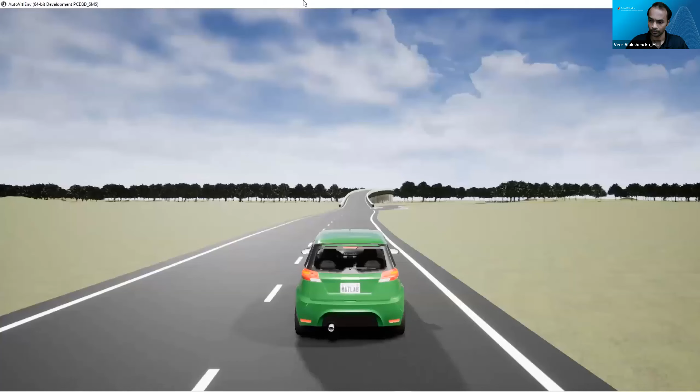Let me know if you all can see my screen. So you can confirm once. Is it visible, my screen? Yeah. Okay, perfect.

So before we get started, there are only a few people, but still I wanted to understand what's your background. Are you a student, or you're working, or you're part of a Formula Student team? Because Formula Bharat is basically for the Formula Student teams, and a lot of times whenever we do the session, it is more inclined towards them. But if you can give me some background, that will really help us understand where you are coming from.

Hi, this is Shrikant. I'm actually a working professional at ZF Commercial Vehicle Control Systems. Yeah, nice to meet you, Shrikant. Thank you. Myself, Nitin, I'm a student at VIT. Okay, nice, thanks for confirming. Hello Veer, I'm Kaushik from Hercules Racing Team. We have met before during the FST event. Okay, awesome, great. Okay, I won't push everyone to talk, it's completely fine. So I'll get started.

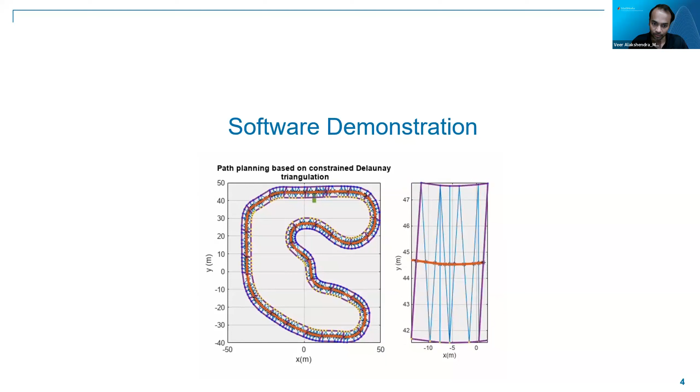What happens is that you have to run all the other algorithms as well: SLAM, your path planning algorithm, trajectory tracking, the perception algorithm. There are multiple autonomous algorithms that you have to run. So whenever you're building a path planning algorithm, you have to make sure that it is going to go on a vehicle, so it should work. And for Formula Student and racing competitions, it is quite complex, because the vehicle has to race and it has to improve the lap time.

So let me go back, and I have my script open. One second.

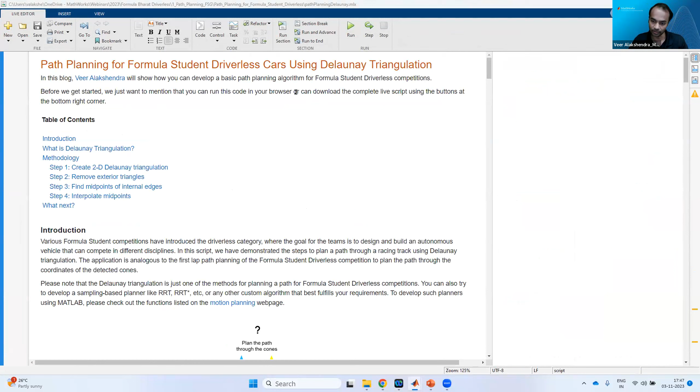Okay, yeah. So this is the script which is available, and I'll talk about how just by using simple functions, simple understanding of triangles and math, you can build a whole path planning algorithm for these kinds of scenarios. Even if you're not from Formula Student or an autonomous racing competition, to give a brief of the problem statement: you have a car, and then you have some blue cones and some yellow cones.

This path planning will come once you have detected all these objects, of course. We are assuming that your detection is proper, you're 100% detecting all the cones and not missing any of them. And if there are any outliers, you're neglecting those or have removed them. So that's the problem. What the vehicle has to do is, based on the position of these cones, find the path through it.

Again, the assumption is that through the perception algorithm we know which are the objects, and we have the algorithm written for which are the blue ones, which are the yellow ones, and what are the coordinates. So this is only the path planning. What we are doing here is using a concept called Delaunay triangulation. The criteria says that for a set of points in 2D, a Delaunay triangulation of these points ensures the circle associated with each triangle contains no other point in its interior.

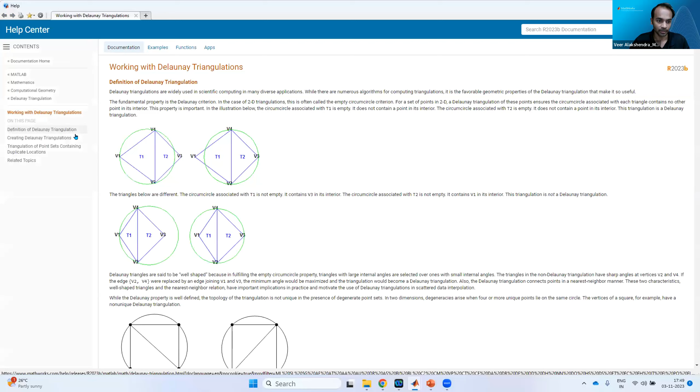For example, let me open this one: these are the triangles formed by the vertices V1, V4, and V2, and similarly V4, V3, and V2. So here both T1 and T2 fall under the Delaunay triangulation, or you can say these triangles are a Delaunay triangulation.

Whereas if you see the next example over here, when we are forming the circumcircle, there's a vertex which is falling inside the circumcircle. So in this case, these two here are not a Delaunay triangulation. So basically, you just have to form a circumcircle based on the vertices that we have. If there is no point inside it, then it is a Delaunay triangulation. If there is, it is not a Delaunay triangulation.

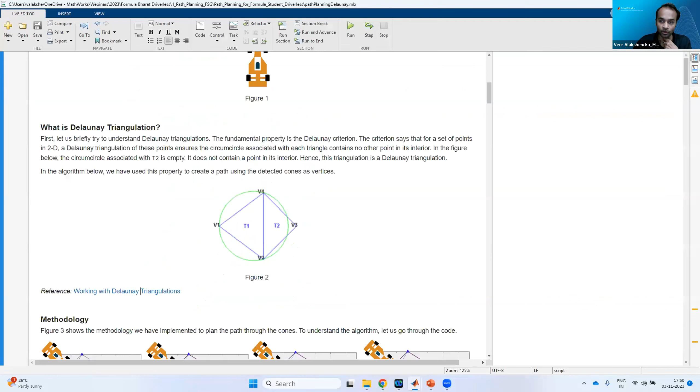Okay. So with this basic understanding of what Delaunay triangulation is, we have come up with a simple basic approach, which is also being used by multiple teams. We have been judging multiple teams across the world, and we are seeing that students are following this method to interpolate, to find the path through these two cones.

So first, we use certain functions to create the Delaunay triangulation for a certain set of yellow cones and blue cones. And then we remove the exterior triangles. Now, if you want to write your own code to remove the exterior triangles, it can be done. But there are certain built-in functions in MATLAB which can help you remove the exterior triangles.

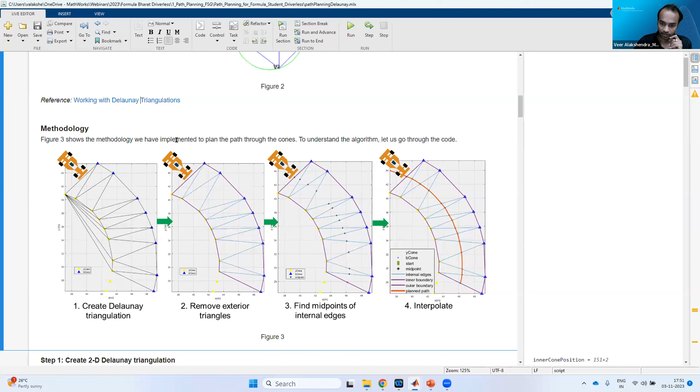And then finally, we find the midpoints. So we have these vertices connected by triangles, and then we find the midpoint, and then we finally interpolate. Okay, so this is how we plan the path.

Now, going in detail through each of these steps, first we load the coordinates. As I mentioned, we are assuming that the perception has been done. So in this case, we did the detection using YOLO, and we have found the coordinates of the different blue and yellow cones. And then there is some pre-processing of the data, because when we are using the built-in function for Delaunay triangulation, there is a certain format that we have to consider.

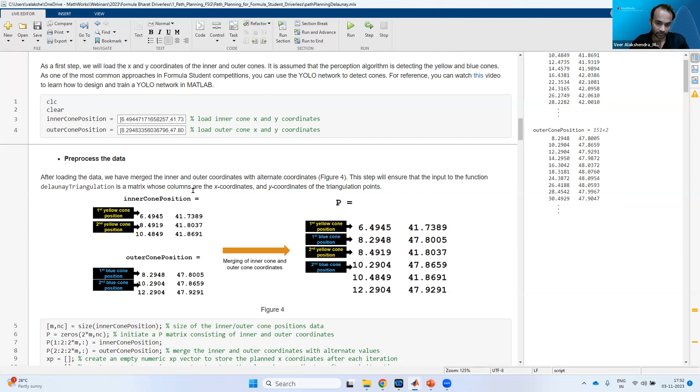So what we have done is that we had the inner cone positions for the yellow and the blue ones, and then we merged them alternately: yellow cone, blue cone, yellow cone, blue cone, once we have the coordinates. Again, this is not necessary in general. It is just being done here because the function requires that they be arranged in an alternate way.

Once that is done, using the Delaunay function that we have, called Delaunay triangulation, we are forming the triangles. So over here, you can see that after arranging them alternately, we have a total of 4 vertices, and then we form the Delaunay triangulation. So this is the triangle that we get. Again, this is the built-in function which we are taking advantage of.

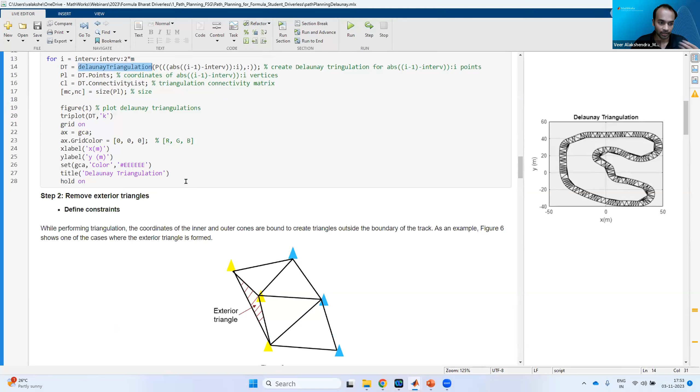And then, from the function, you can extract different properties. For example, here we have to remove the exterior triangles. I can also show what the Delaunay triangulation looks like once we run the program. Let me run it once. Okay, it's running. Meanwhile, I'll go through the steps.

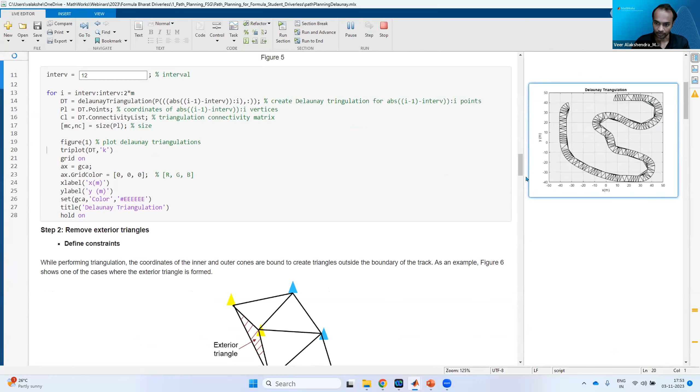So we remove the exterior triangles. To remove the exterior triangles, we have certain functions, and we are removing this kind of triangle. For example, if we take these many triangles, there will again be a Delaunay triangulation formed, because there are 3 vertices, so it is forming a triangulation over here as well. Now, if we keep this, then of course the path may be disoriented or deviated, and it can go from here to here. So there are multiple approaches.

One approach we are showing over here is removing the exterior triangle. Another approach could be that, using different properties, you can form a bound. So you can form a bound between this one and that one, and then you can mention in the code that I have to pick the sides only between these bounds. So that is also possible, but we are actually using the function properties.

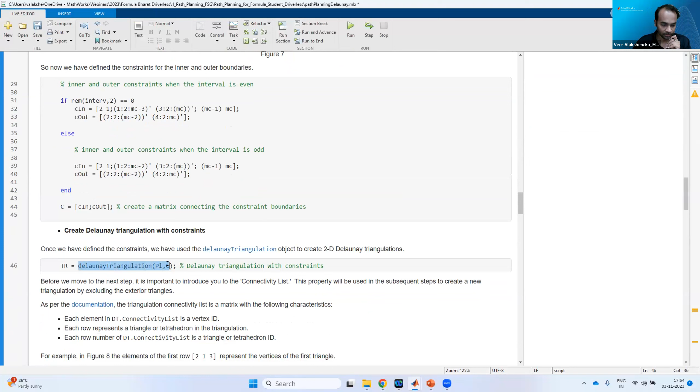So for that, what we do is we define the constraints. Okay, so there's a certain format. So we are defining the constraints over here. And then we are using a certain create Delaunay triangulation with constraint function that is over here. So Delaunay triangulation with C is basically mentioning the constraint.

And once you do that, what happens is that you basically remove this triangle, and finally you get some triangles like this, removing this part. Okay. And once you have used all these functionalities and you have removed it, this is how it will look like. So this is the triangle that we'll get, okay, after removing this.

Now, after this, it is quite simple. Reason being that you have all the set of different sides, and you just need to find the midpoint out of it. Now, many a times students ask, okay, why are we doing so much complication forming triangles? Why can't we just have straight lines between this?

So if you do that, the problem will be during the turning. If you're turning, in that case, you might miss some of the points, because, for example, if you're missing some kind of cones, you might miss some of the sides. Okay, and in that case, maybe there might be some deviation.

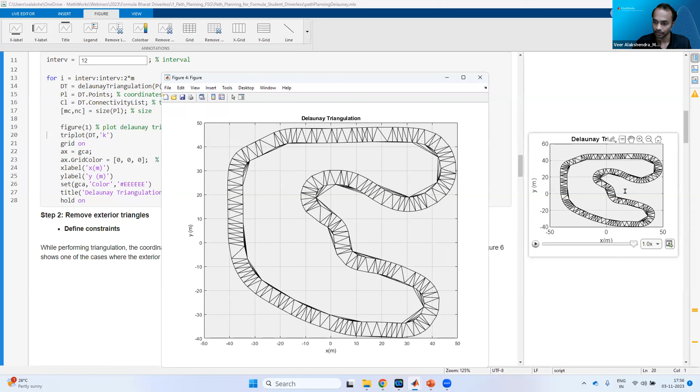So this was the image which is showing all the exterior triangles over here. You can see that this is forming different exterior triangles. So this is the one way. And then if you go down further, okay, so we have done all this part. And after that, once you have removed that using different functions, this code is available, no worries, you can have a look into that.

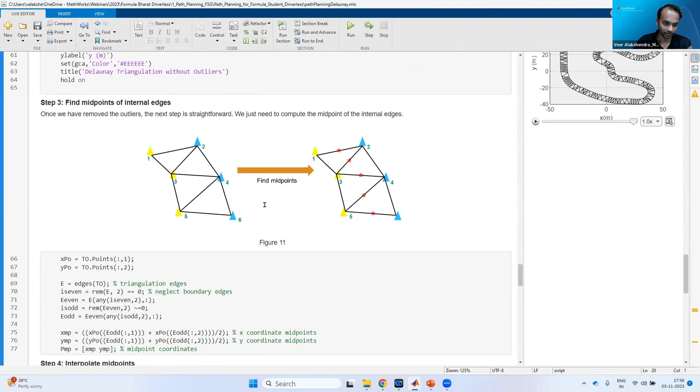Then what we do is, once we have this, we just find the midpoints out of it. Again, there are simple ways to find the midpoints. There's odd and even ways I have mentioned over here in the code. And once you do that, further we do the interpolation. So this is the final thing that we get over here. This is what we get.

Now, this code has certain limitations. The limitation is that we have already assumed that if there are any false positives, we have removed them. But if you run on the actual track, it might happen that your perception algorithm might miss some of the cones, or there could be some false positives. In that case, you have to improve the code.

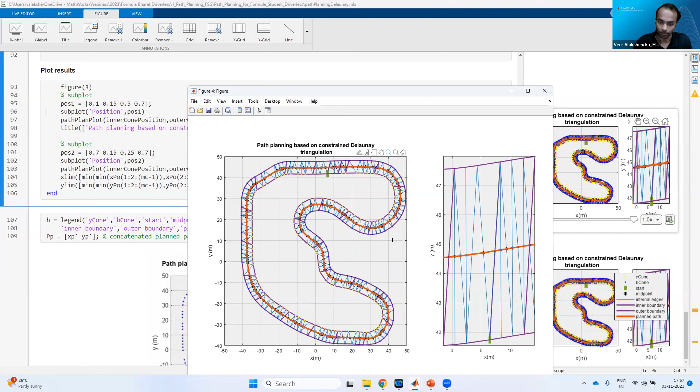So that's also something that we haven't done as of now, but that's not a big deal, because once you have the false positives, again, you have to accordingly mention the constraint. Once you mention the constraint that this is our constraint, we have to be in this bound, you can get rid of all the false positives, or any outliers, if by mistake it is detecting those points as a cone.

Okay, so this is one kind of solution that we have come up with for the Formula Student competition. Now, this can be further improved. A lot of optimization can go into this, and then you can also have race time optimization. I'm not going in detail into that because we have limited time. Okay, and already it's 5:58.

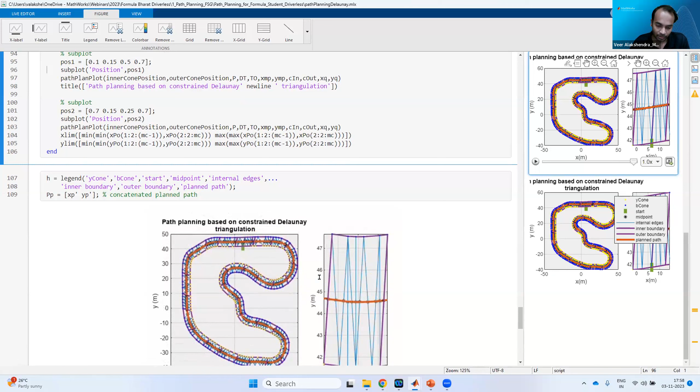But nevertheless, can I ask someone, if you are a little bit aware of other generic or popular algorithms, like there are graph-based algorithms, there are hybrid. A-star is one of the very famous algorithms in robotics as well. And then under that, we have RRT star. Or in layman's words, these are tree-based approaches, which will form different nodes, and between those nodes, it will try to form a path.

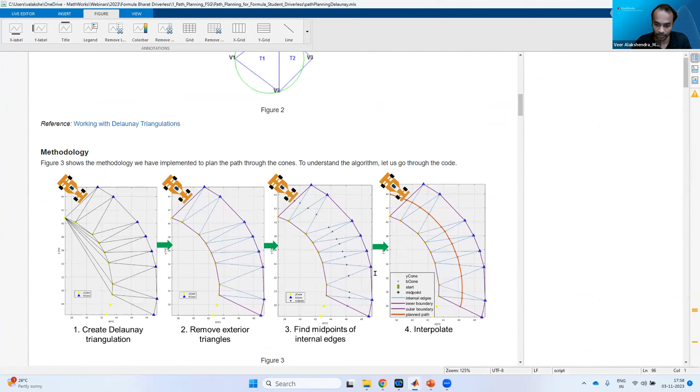Can anyone answer that? Why in scenarios like this, students or teams, even the strong teams that we have seen, the top teams of the world, mostly rely on this kind of triangulation method? And why not these A-star or RRT star, the different path planning algorithms that we have? Do you have any idea? Do you want to share anything? Time complexity, maybe?

Sorry? Time complexity. Yeah, it's basically the computational complexity. Yes, that's a problem, a major problem. The one that we saw a few years back, there was someone who was using RRT star, and the code was really good. It was really working. For example, if you take a simple occupancy grid, it was forming all the different nodes and trees, but it creates so many nodes that it can be computationally complex, and then you have limitations on your hardware.

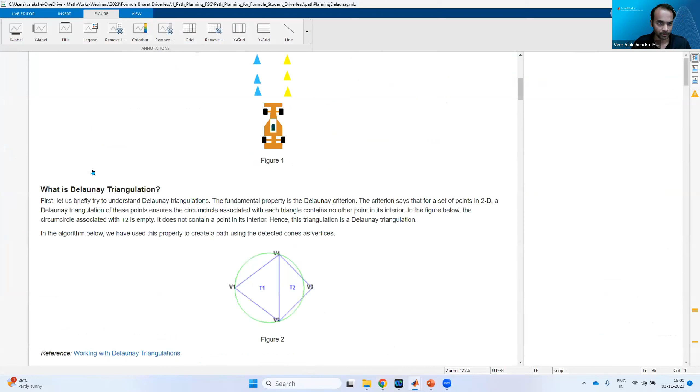So this is one of the major reasons that students are going for this triangulation method. The approach that we saw is very simple, but you can definitely improve it. This code is available on our webpage. We haven't yet published it on GitHub, but it was in the form of a full blog. So if you want to have a look, or open it in MATLAB Online, you can.

All these blogs that we publish have a feature to open them in MATLAB Online. This is the button that you will get: run in browser, download live script. So you can download from here, or you can run in MATLAB Online.

Any other question you have? If not, I can go to the next part, and then we can start talking about the VD part and the trajectory tracking controllers, which are the common ones mostly used in autonomous driving, and how the tools provide quite an easy workflow to implement that.

I have one question about the deployment. Let's say I'm reusing the Delaunay triangulation method shown on the web page. If I want to flash it to my hardware, what is the recommended approach? Is it usually flashed in hex format, or does it have any MathWorks-specific extension for which we have to take care of some additional steps?

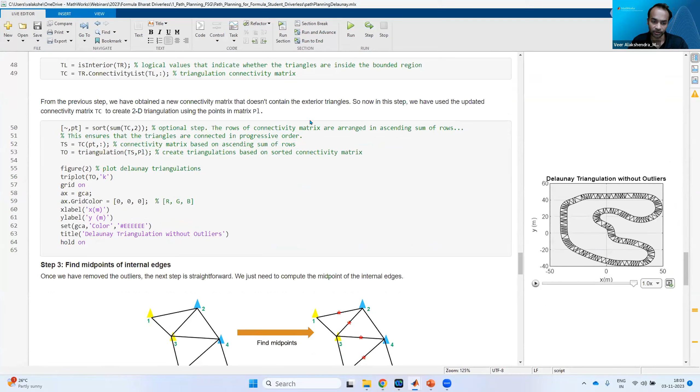If you write it from scratch, that can be code generatable. That is one of the limitations of the code currently. I'm forgetting the function that we used over here, but there was one function which was not letting us generate the code. Otherwise, most of the functions can be done. It will be using MATLAB Coder and Simulink Coder, and if you are using standard boards, you can use the support packages to generate the code. I'll do one thing.

We recorded a full tutorial series for students, or I mean anyone can do it. It's a full series on the code generation capability. So it will also explain what are the file formats that you get, and once you generate it, how you can edit those files. So that information you can find in the full training.

Yeah, that would be great. Yeah.

So this is the full online tutorial that we have, and this is an in-depth tutorial. So you can see over here, it starts with code generation with MATLAB and preparing and customizing generated code for MATLAB, then code generation with Simulink, and then again how to customize. For example, you have all the hex files, how you can customize them. And then finally, we have also shown a deployment part over here. So this is the one.

And in the last webinar, we covered this YOLO algorithm deployment on Jetson Nano. This also you can have a look at. This was the NVIDIA Jetson video content that we covered in the last session, so you can have a look into this as well. I hope this will help you.

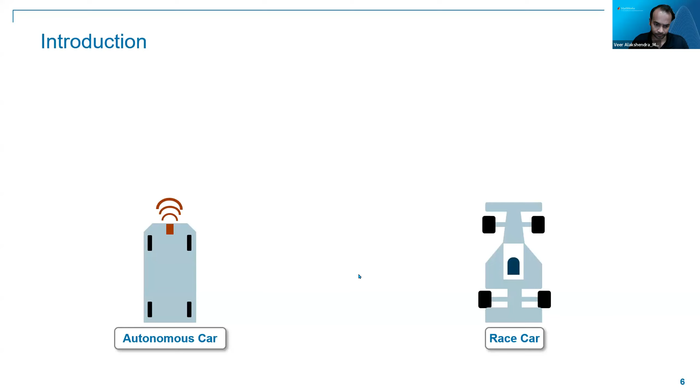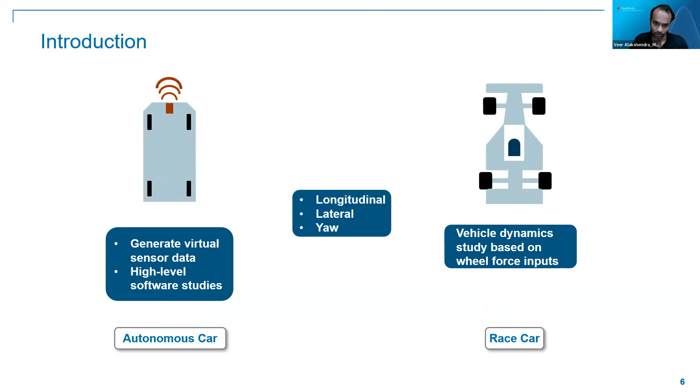For example, if you are participating in autonomous competitions or looking into autonomous vehicles, and your focus is just to generate virtual sensor data and high-level software studies, you can build a simple model. Or if you want to build a race car with proper vehicle dynamics study based on different wheel forces, a high-fidelity model, that also you can do, through which you can get the longitudinal, lateral, and yaw motion.

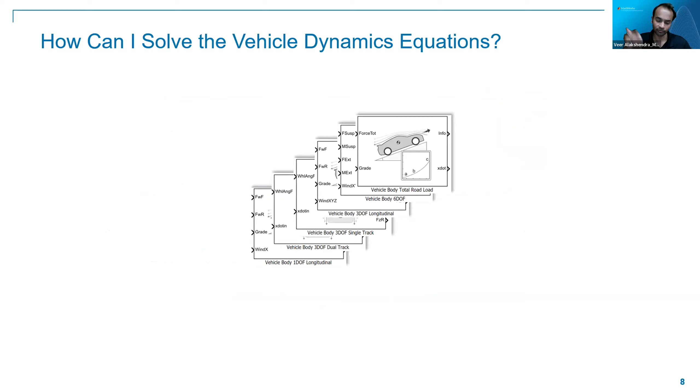Now, how to solve this? One method is, as I explained, you convert the set of equations into a model. Or we have provided a blockset called Vehicle Dynamics Blockset, consisting of different pre-built blocks where you just need to define the parameters, and then based on certain inputs, you will get the expected output. It consists of a library of blocks: powertrain, wheels and tires, steering, suspension, vehicle body, vehicle scenarios, and utilities.

It also has pre-built scenes. For example, for autonomous driving, you are going to create some kind of virtual scenes and scenarios. We have already added certain pre-built scenes, but if you want to build custom ones, that can also be done; we explained it in the first session using RoadRunner. We have also added certain examples which you can refer to, or for virtual testing, you can parameterize the whole model and perform the virtual testing.

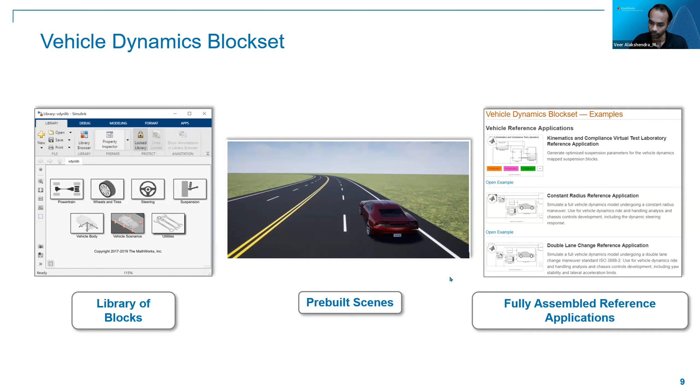First of all, we'll look into certain blocks and see how you can build a simple model to a complex model with these vehicle dynamics blocks. So let me open that. I'll close all the other things. So for example, if I just open the simple one over here, this is just a simple model. In the library, let me go through the library that we have.

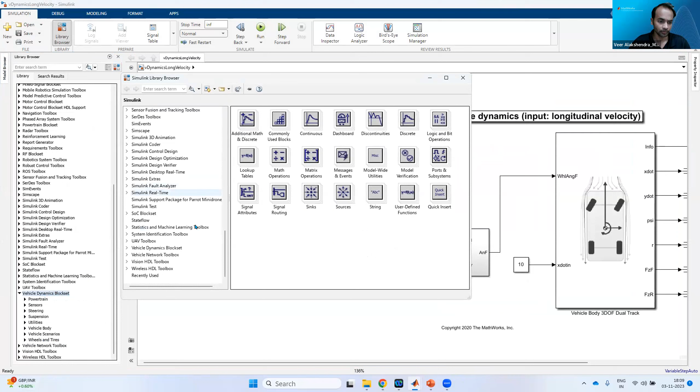And I'll undock this. So over here, you can see that we have all these different sections. Okay, so vehicle body, you can find the vehicle body over here. You can have a 6-DOF model or you can have a 3-DOF model over here. Similarly, we have different suspensions, steering, powertrain, and tires.

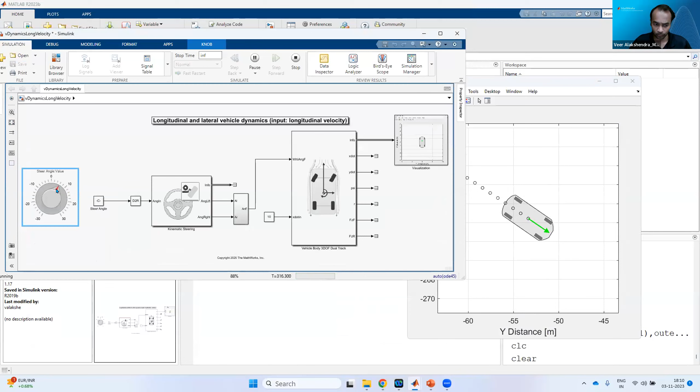So for example, if you just want to collect some kind of synthetic data, so you have built a model and you want to simulate it in some kind of Unreal environment, it is quite simple. For example, these are different blocks, and what you can do is, based on steering input, you can run the vehicle in a simulation environment. I'll come to that simulation environment which I'm talking about. This is how to do it.

Okay. Now, this is a sort of a very basic model, I would say. It doesn't have much of the information. Further, if you want to build some kind of more complex model, it can be something like this one. So over here, we are going one step ahead. In the earlier model, we have the vehicle body 3-DOF model.

So if I double click on this, this model lets you choose how well defined you need the vehicle dynamics model to be. Whether you just need the external longitudinal velocity, or you want just the longitudinal forces in the tire, or you want both the FX and FY tire forces, which could be a more detailed model. And then further, you have these other parameters that need to be defined: longitudinal, lateral, yaw, aerodynamics, environment, and simulation. Okay.

And then going ahead, we have a steering system, which was also earlier. And then what we have done is we have added a simple powertrain over here, comprising of one simple longitudinal wheel disc brake. And then we have a simple equation-based powertrain. Here, we are not using any block set. It is just based on the power calculations. We have a simple powertrain giving you the axle torque, and then we are using a rear wheel drive and sending the axle torque to the tires.

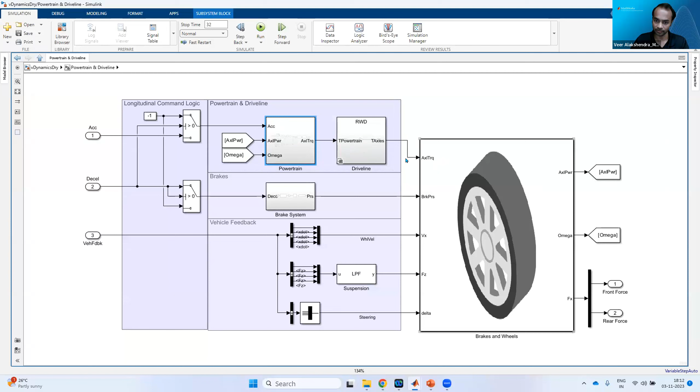Okay. And now again, here also, based on your steering, acceleration, and deceleration, you can run the model. Okay. So basically the whole point is that whether you want to create a simple model or a more high fidelity model, that can be created using this block set.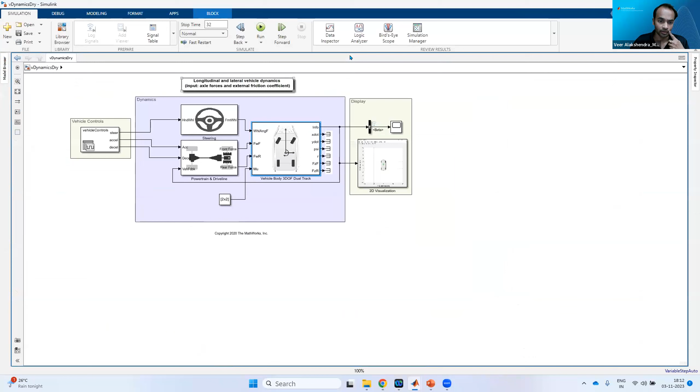Now, for example, if I go inside this vehicle body part, let me get inside this. Once again, let me minimize. Yeah. So all these blocks that we see are all open. So you can go inside and look into how we have built this model. But more than that, you can also have a look into the help document, because this help document will make you understand how we are building this block using different equations. Okay.

This is the whole documentation that we have provided. This will help you understand that there are multiple input and output ports. So whether it is a vector, whether it is a matrix, whether it is a 3x4 or 4x3 matrix, it will help you understand how you have to input the signal. Okay.

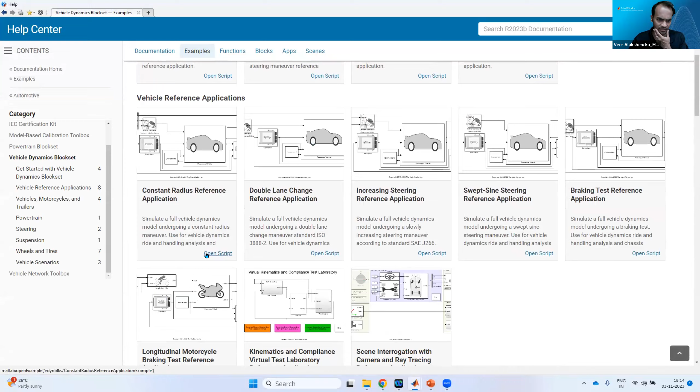Now, further, if you want a very high fidelity model, if you want to include each and everything in your model, it should be a 6-DOF model, it should have a controller, it should have a full complete powertrain. So let me open that one more. So in here, when we go to the Vehicle Dynamics Blockset, in the examples, if we open the constant radius or double lane change, whichever you want to see, this will open this model.

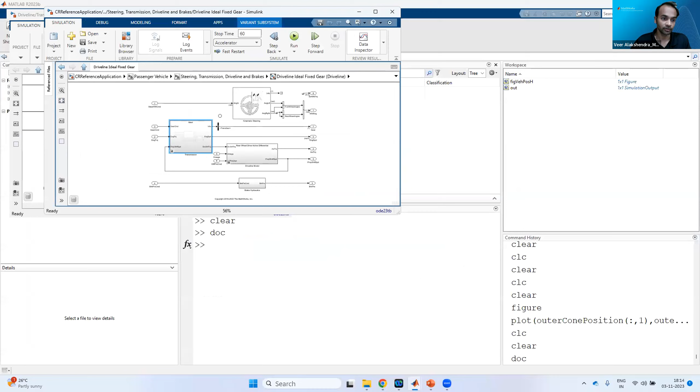Okay, so now you can see that if we enter this passenger vehicle subsystem, this has engine, transmission, driveline, and brakes in detail. Here we are using the kinematic steering. We have a transmission, which is a fixed transmission over here. And further, you can also have a driveline model. This driveline model looks like this. This is the active differential that we are using. And we have also mentioned the torsional compliance for both the parts, for the axle 1 and the axle 2.

Now, this is just giving you references that you can, based on the fidelity of the model that you require, you can build the model. If you're learning, if this is your first time, the suggestion would be just to start simple, build simple models, because in that case you will be able to build more and more, you will understand the whole concept of modeling using these toolboxes, and further that can be used as an advancement to more high fidelity models.

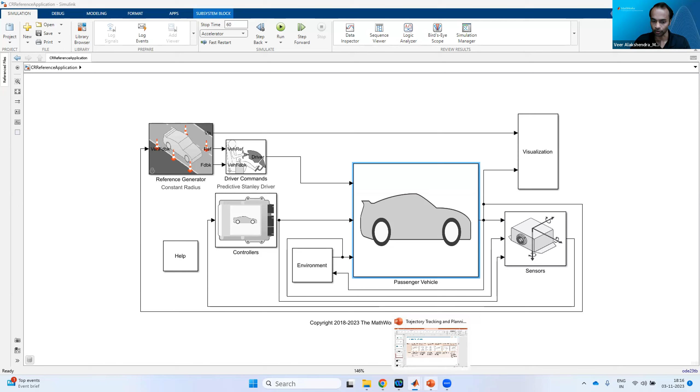So what I'll do is, now that you have an overview of the vehicle dynamics model, now we'll see how you can build trajectory tracking controllers just by using simple blocks. Before we get into that, if you have any questions, please feel free to ask. Okay, if you don't have, no worries.

Do you know what are the different types of trajectory tracking controllers? Or have you worked with any of the trajectory tracking controllers earlier? Or are you still in the exploration mode, learning what the different trajectory tracking controllers are? I know about model predictive control. MPC. Okay. Fine. Thanks for answering that. So what we'll do is we'll go step by step.

So for example, there are three popular trajectory tracking controllers, and then we have also your favorite PI controllers, but we are more talking in terms of steering control, how you do that if you want to control the steering. The first one is a pure pursuit controller, then a Stanley controller, and the third one is the MPC controller. Now pure pursuit and Stanley controller, these are both geometric controllers.

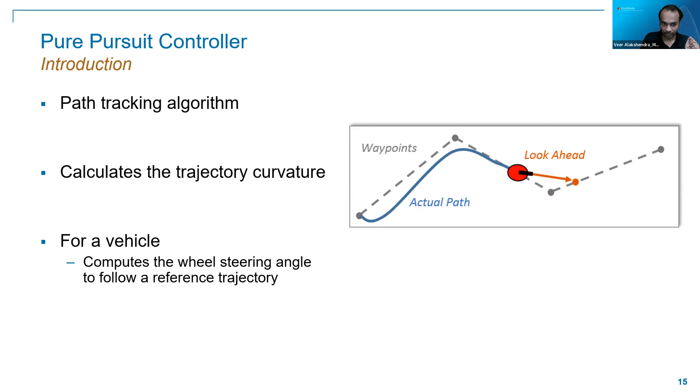Even if you're not using the block that we have provided and you're just writing the equations, you can do that. In this one, one of the governing things is the look ahead distance. If the look ahead distance is smaller, the path will be oscillatory; it could be accurate, but it will be oscillatory. However, if the look ahead distance is large, it will be less oscillatory, but it might not track the trajectory properly, especially during a larger curvature near the corners.

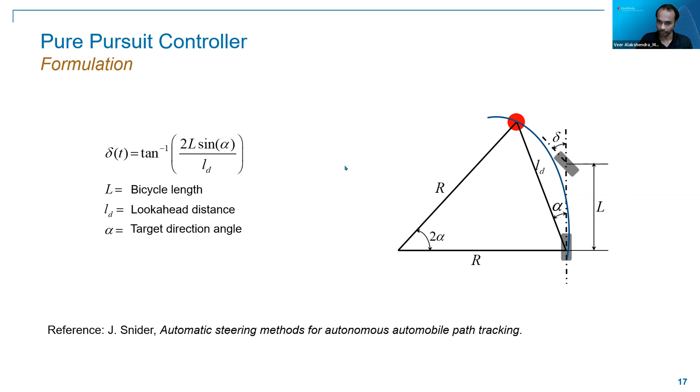Now to implement that, we have created certain waypoints. We won't get into how we have created the waypoints; it's just the XY or the pose we have defined. Then we have built the vehicle model and controller in Simulink, and we have also integrated with the Unreal Engine. How to implement this is based on the libraries that we are using in this case.

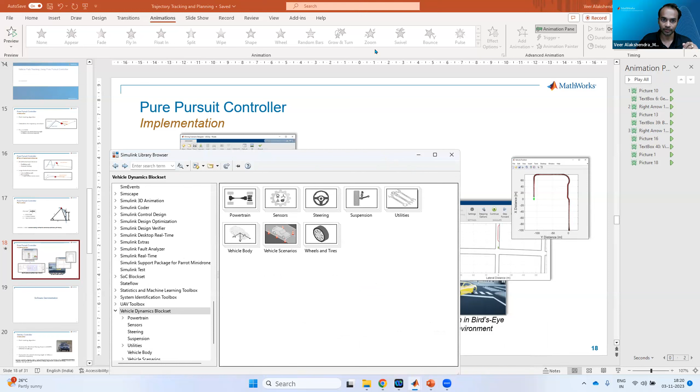For example, these can all be found if I go into our Robotics System Toolbox. Over here you can see that in the Robotics System Toolbox, you have this pure pursuit controller. Now, let me do one thing. I'll just call this block and we'll see what it requires and what the inputs and outputs are.

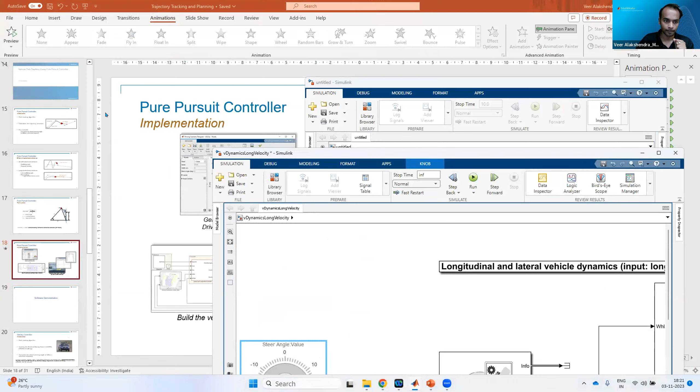Okay, so this is our block that we are calling the pure pursuit block. This is accepting the pose X, Y, theta, and then we have the waypoints, and then it is giving the linear velocity and the angular velocity. So if you see over here, it is only giving the linear velocity and the angular velocity, but in our case, we also want to get the target direction.

Once we activate this one, this will give you the target direction output port. And then you need to define certain parameters; one of the parameters over here is the look ahead distance that you have to mention. Now, to build this using the vehicle model, using the blocks in Vehicle Dynamics Blockset and the pure pursuit block, it's quite simple.

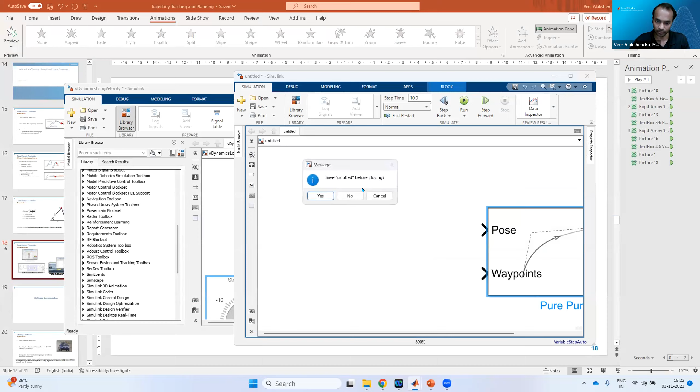So let me open this simple model. Over here, you can see that we are using the same vehicle body 3-DOF model which we used earlier. Then we just have a pure pursuit controller block, a waypoint block, and a visualization block.

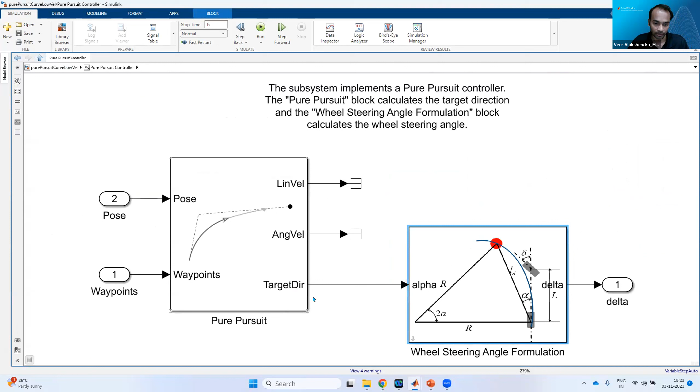In the pure pursuit controller, we have used the same block, defined the look ahead distance, and then we are converting the target direction into the wheel steering angle. For that, we are using the same formula, tan inverse of 2L sine alpha by LD. Alpha, which is the target direction, we are getting directly from this block, and then we are just converting it into the wheel angle.

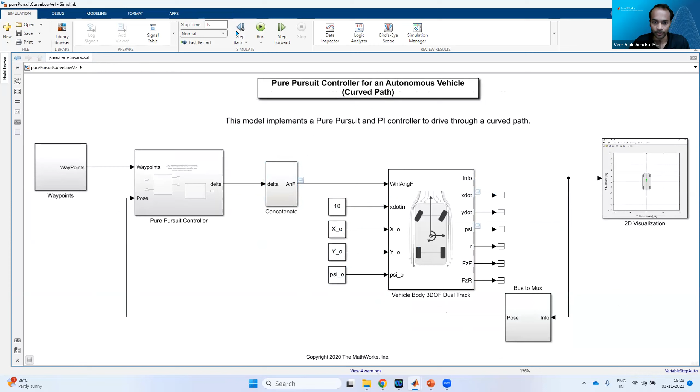Then we are sending it using a concatenation because it requires a certain vector form, and we are giving it as an input to the vehicle 3-DOF block. Currently we are just running it with a constant velocity. And then we have the initial pose that we need to define, from where the vehicle is going to start. Now, if I run this, you can see that it is exactly tracking the trajectory.

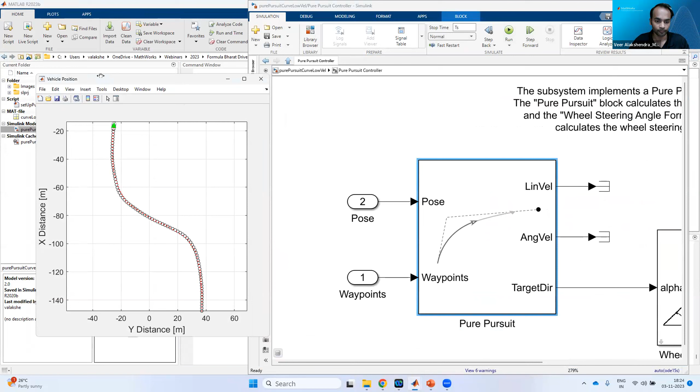Now, for example, if I change the look ahead distance. Let me see what it is currently. Okay, it is 5 now. If you remember, we said that if it is too short, it will be a little bit oscillatory. So let's try whether we get that. I'll reduce it by 4, so that will be 1, and let me run this. Okay, so you can see over here that it is now oscillatory.

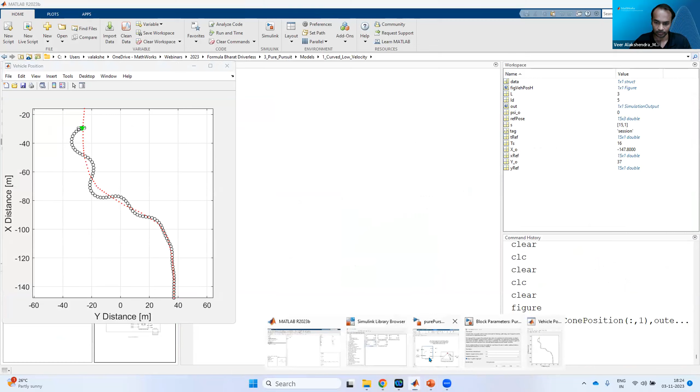Similarly, if I make it larger, it will be smooth and won't be oscillatory. However, it will miss the trajectory. So again, running this. I think this still works with a value of 9, so I'll make it much larger, for example 15. Let's see what happens. Okay, you can see some deviation over here during the curvature part.

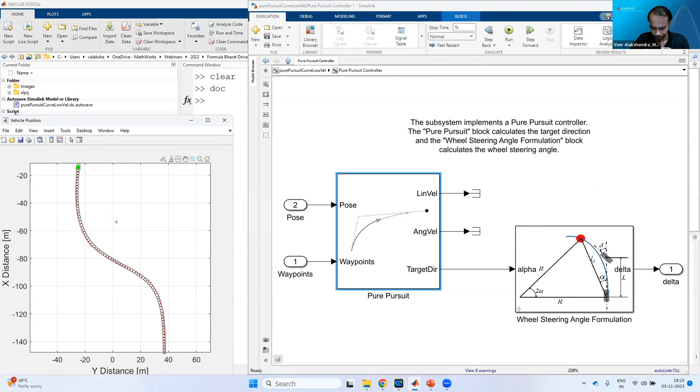So the whole point is that this is a very simple model, just like a toy model or a robot model. In a robot, we are not much concerned about the interaction between the wheel and the road surface, and it is just moving with a constant velocity. Now we'll get into a more detailed model, as we saw in the previous models, with a simple powertrain and tire and road interaction.

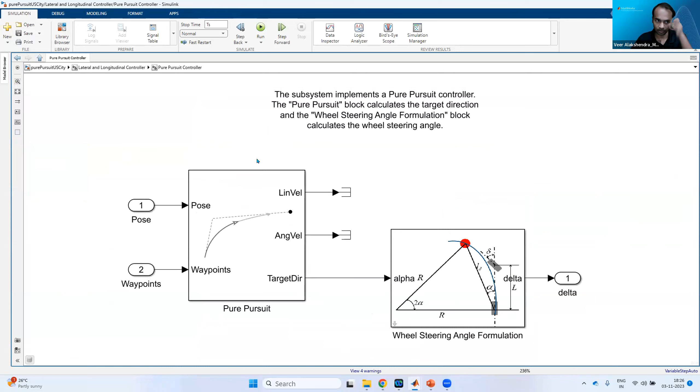For that, we are using a pure pursuit controller block for controlling the steering angle. And for controlling the velocity so that it matches the desired velocity profile, we are using a longitudinal driver, which is just a simple PI driver, using the PI controller to match the desired drive cycle.

And in this case, it is giving you the acceleration command and the deceleration command, or the throttle or the brake. And then here we have the waypoints. And additionally, based on the region of the map, or based on the X and Y, we have created a lookup table: if it is in this XY region, the velocity is this much. So that's what we have kept over here.

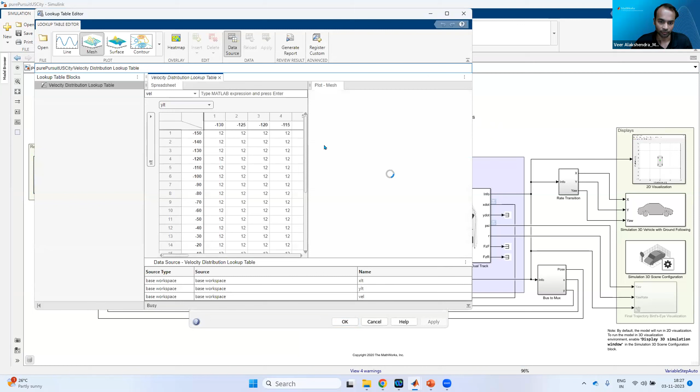So if I just open this, you can see that the velocity is increasing and decreasing based on the XY values. So this is what we are doing. And so this is the whole thing with new things like the velocity distribution lookup table and the longitudinal driver. And what we have additionally added is we are now interfacing it with a scene.

The scene is based on a US city block. So there are multiple scenes in this block. This block is called Simulation 3D Scene Configuration. This block basically configures your Simulink model with the Unreal part. So there are multiple options. We have straight road, curved road, parking lot, and everything is there.

And the default scene you can get from Unreal, but with the Unreal Editor, or if you have it from RoadRunner, or if you have any Unreal exe, that also you can do. But here we are using the default scenes. Then further, we are selecting a car. For example, here we are selecting a muscle car, a fancy sedan car, I would say, but we also have a basic sedan car over here.

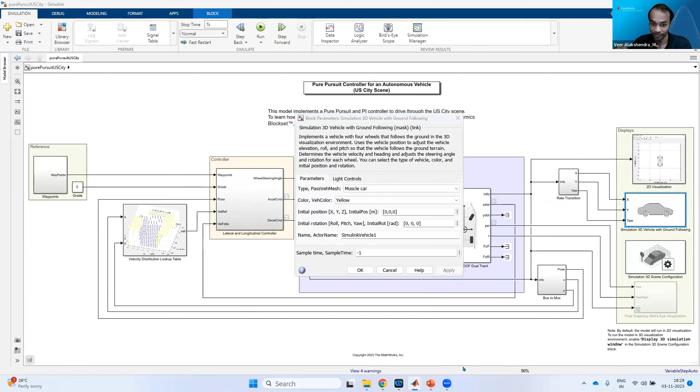I have only one screen today, so that's why everything is popping in front of my screen. So I'm having a challenge.

So now you have understood that we had a vehicle dynamics block and then a lateral and a longitudinal controller. Why? Because we want to move fast now. We don't want to move like a robot. And here we are also providing a velocity distribution, which is a velocity based on the XY position. And the target of the new driver, the longitudinal driver, is to follow that velocity profile. So now let's run it and see what happens.

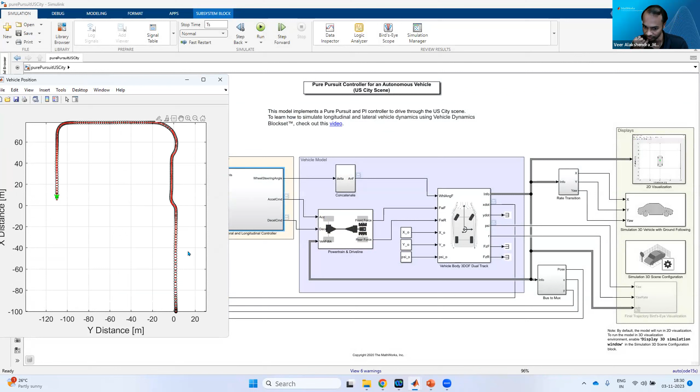So I see over here that we are moving much faster, in a city drive. And here is the result that we are getting. You can see that the result is perfect. Now, before I move to one more interesting part, do you have any questions regarding this? I can also run this with a Formula Student car. Yes, we have it over here. I don't know if I have to do some settings with the FS car. Let's see. Okay, this is your FS car now.

So yeah, any questions until now? If not, I'll also show you some of the other features you can use with the model. For example, if you have to collect certain data from a camera or from a LiDAR, here you can add cameras which are already there in the toolbox. For example, I'm bringing in a Simulation 3D Camera, and I will give the image output to a video viewer.

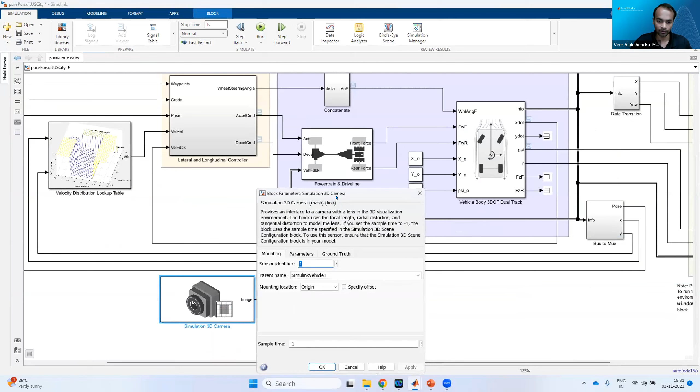And further, I want to mount it. So I'll mount it on the front bumper of the car, and then I'll just simply apply. And further, let's change the car back to the muscle car because it will give you a better view. And now let's run this. It will show you the Unreal part, and at the same time it will also show you the camera part.

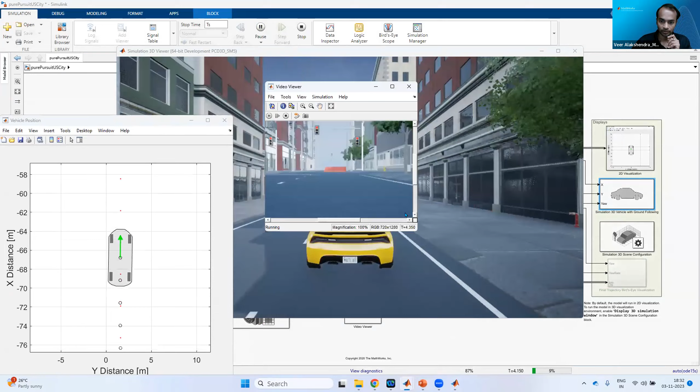Now, if you have this view from the camera or from the LiDAR, we have LiDAR blocks as well, you can also try to build your own perception algorithm because now you have synthetic data. So you can try different scenarios, different conditions, and test your perception algorithms.

Awesome. And this question we also keep getting from the students. For all the Formula Student teams, the license that we are providing to Formula Bharat contains all these toolboxes that I'm talking about today. Any other questions apart from this? I know it's more than one hour now, but if you have any questions, you can ask, otherwise we can just move to the next part.

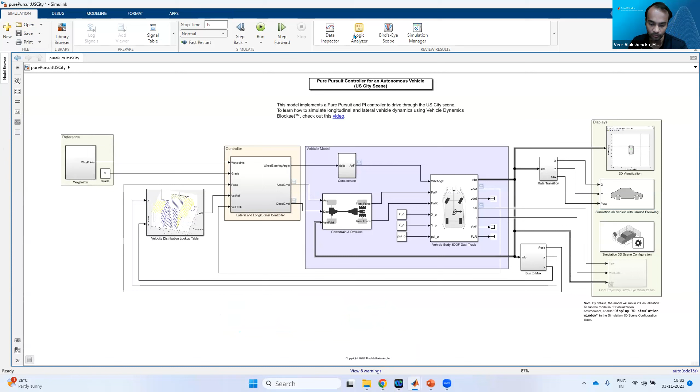Okay, no worries. Now, once we have seen the pure pursuit, if you would have seen, the pure pursuit controller is not taking the vehicle dynamics into account. So that's one of the drawbacks, because if you have a very high fidelity model or a bumpy road, in that case you might face issues while tuning the pure pursuit controller.

So one option, as we have often seen, is to make the gain adaptive. You can also try that. In that case, you can take into account different bumpy roads, but still, if it is moving fast on a bumpy road and you have a very high fidelity vehicle dynamics model, it might fail in certain scenarios, but not always. It depends upon how you're tuning it.

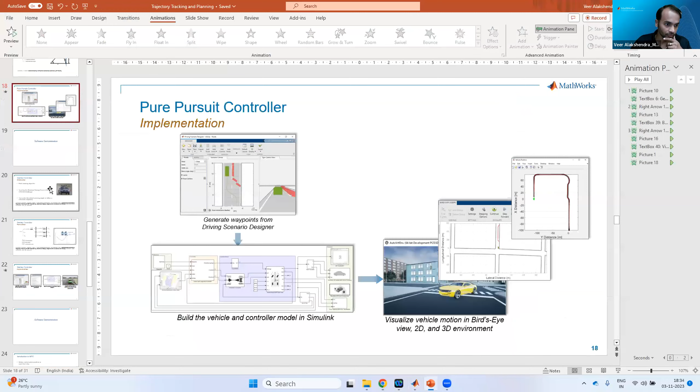Now let's go to another controller. This is a very popular controller, and it works because to some extent it takes a simple vehicle dynamics model into the controller algorithm. This is the Stanley controller, and it was used back in the DARPA Grand Challenge, I think the second or third one, for autonomous driving. And from there, they built this geometric controller.

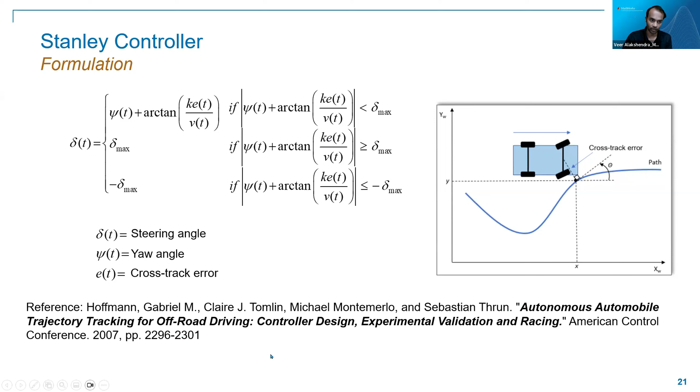If you want to implement this, it is quite a simple job again, because we have the blocks for the Stanley controller. So let me go into the model that we have and run this. In here, things are the same. The only difference is that here we are using two controllers. One is the lateral controller Stanley, which is based on the formula that we saw, and then we have a longitudinal controller Stanley.

The longitudinal controller Stanley is just a PI controller. So even if you replace this with the previous PI controller or the longitudinal driver, it will work the same; there's not much difference. The difference is that this takes into account the dynamic bicycle model, a very simple vehicle dynamics model. Here we have options for the kinematic bicycle model and the dynamic bicycle model, and you can define the different gains from the formula.

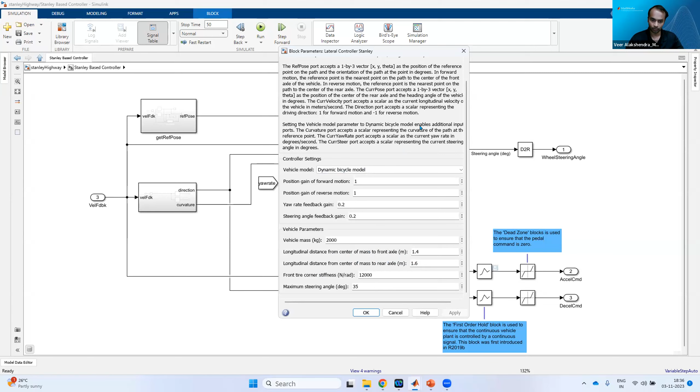For the vehicle dynamics part, we are asking for the vehicle mass, the longitudinal distance from center of mass to front axle, different dimensions, and the tire cornering stiffness. Again, the procedure is the same. You have the powertrain, the vehicle body, and the Stanley controller. In this one, we tested the model in a US highway scene, and if I run this,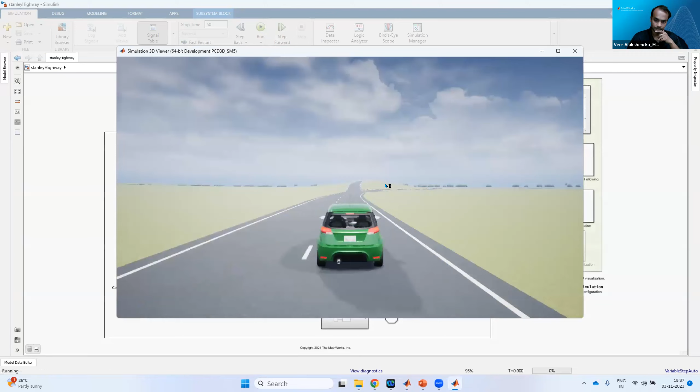I downloaded this today, tuned using the last version, but it still works fine. Only the timing of the brake; I think at the end it will crash into the side lane. Yes. So in any case, to track this trajectory, the important thing is which type of controller you are using for the steering, and along with that, how you're tracking the velocity profile.

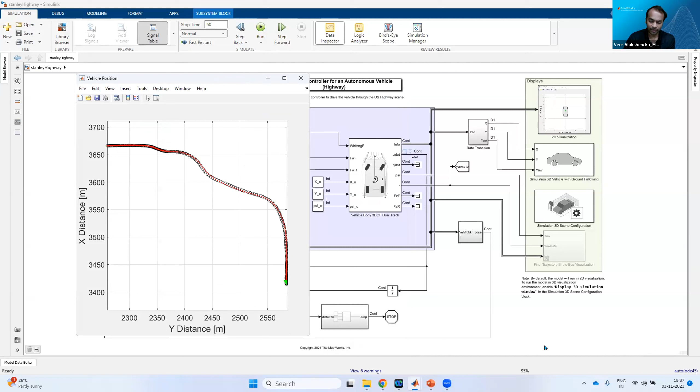So do you have any questions until now, anything surprising or anything you're not understanding? I know there are a lot of things in the content, but you can also put them in the chat if you want. No need to switch on your speakers.

Okay, perfect. So now the last part. I heard that someone spoke about MPC. What advantage will MPC have over these two controllers? Can anyone say what the advantage of MPC over these geometric controllers will be?

I think Kaushik, you mentioned that you have heard of MPC. Any thought? What do you think? Like compatibility, I would say, but not sure.

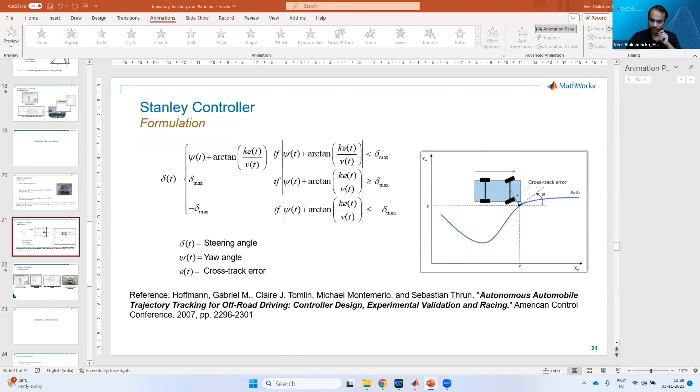Okay, no worries. I would say the advantage in this case is that it will take the full vehicle dynamics model into account, and more than that. Let me bring that block diagram that we have. More than that, it solves an optimization problem at each time step. So when you're running the algorithm while you're driving, each time it will try to correct that. So that's an advantage. And the optimization is based on the vehicle model, which is inside that.

So you have a plant model, but you have the MPC controller, which is basically running an optimization problem based on the vehicle model. And also it allows constraints. So if you want to put certain constraints in the controller, that also can be done. And it can be implemented on linear and nonlinear models.

However, in the initial part of the session I told that the problem here is that it is computationally expensive. Why? Because there's an online optimization going on when you're running the algorithm.

So again, here the implementation is quite simple using the blocks, but I would suggest that if you are very much into MPC, model predictive control, there's a full tech talk from our end on understanding the MPC concept from scratch. I think it's a series of 7-8 videos. Watch that, and then directly jump into these kinds of implementations.

If you're a student, that definitely helps to understand the concept of MPC, because in MPC the challenging part is tuning the parameters, because there are different parameters, different gains, different constraints. For example, let's get into the last model that we have.

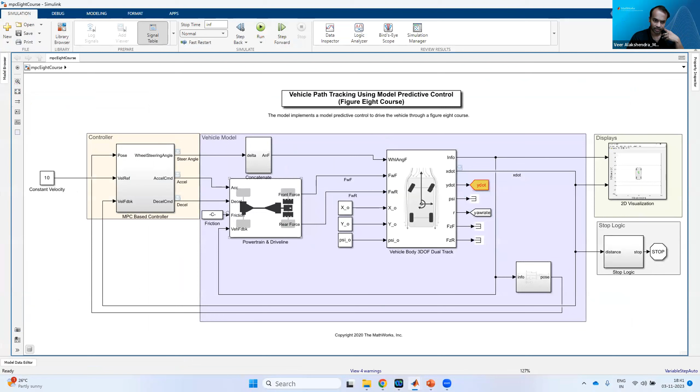So let me first run a simple MPC 8-course example where we are just tracking a skid pad, or you can say just an 8-course. If you go into the MPC block, the tuning parameters are humongous. There are a lot of tuning parameters. First, the constraints that you define: minimum steering angle, maximum steering angle, acceleration.

And then you have the sample time, prediction horizon, control horizon, and then you have to define the weights also. So this part, the model predictive control settings and the controller behavior, is the challenging part to tune. Now, again, we built the model based on the 8-course, so this will perfectly track it. The tracking is really good compared to Stanley and Pure Pursuit, but at the cost of computational complexity. So it is computationally expensive.

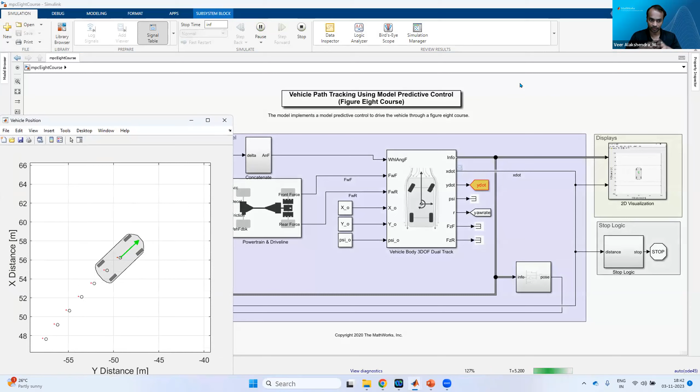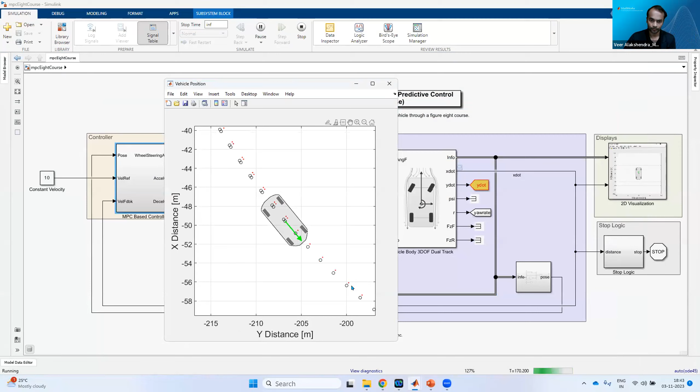So meanwhile, it is running. Let me see. It is taking 2 rounds in one circle, and in the other circle it is taking another 2 rounds. You can see over here that this was the reference path, 2 circles with 2 rounds each, and it is perfectly tracking it.

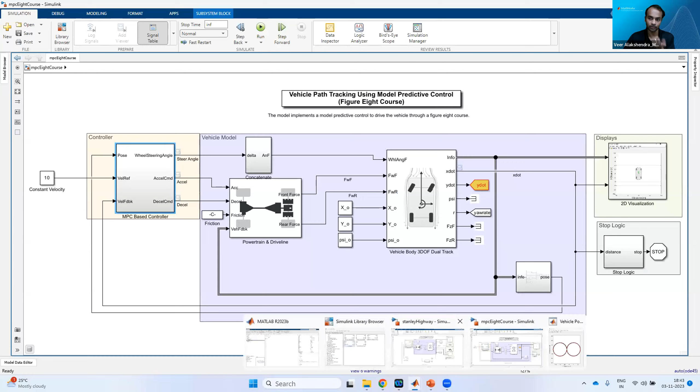I was mentioning that if you want to learn the whole concept of model predictive control, this is a good series to watch. You can watch the series, understand the concept, and after that, you can also try the models we are showing in this whole series hands-on, and then you can get into more advanced models like this one or the highway tracking. So what I'll do is I'll just put it over here.

Yeah, and okay, so any question? Okay, before that, if you have any questions, there was one question which initially came. I think it was from Kaushik regarding the code generation.

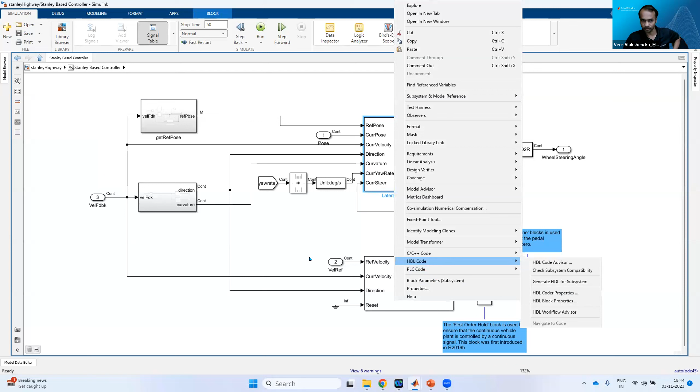So all the examples that I showed for the pure pursuit, for the MPC, for the Stanley, all these blocks are code generatable. So for all these blocks, you can generate the code out of it. Okay, so you can see over here, you can generate an S-function, you can generate code, and you can deploy or flash on the hardware. Yeah. So here you don't have to worry, because all these blocks, when they were built, are all code generatable.

Okay. Yeah. Fine. So this was the end of the whole content. I know it's crossed more than 1 hour, so sorry for that. But the whole point is that

there are few things when you build some kind of controllers. First of all, wherever we were talking about the waypoints or the reference signals, the first step should be cleaning that, or doing some pre-processing, because if there are certain outliers, if you have X and Y going from one point, and then there is a deviation, or maybe some noise, you need to remove that, and then you prepare the reference signal.

And then for higher velocities and varying curvatures, combining lateral and longitudinal controls gives better tracking results. Why? Because you can't move in sharp corners with a constant velocity. So that's why you saw that in the Stanley controller, we had lateral and longitudinal controller. And in the MPC also, the MPC block was giving the steering output, and it was also giving the throttle and the brake command. Okay, so it's better that you do it.

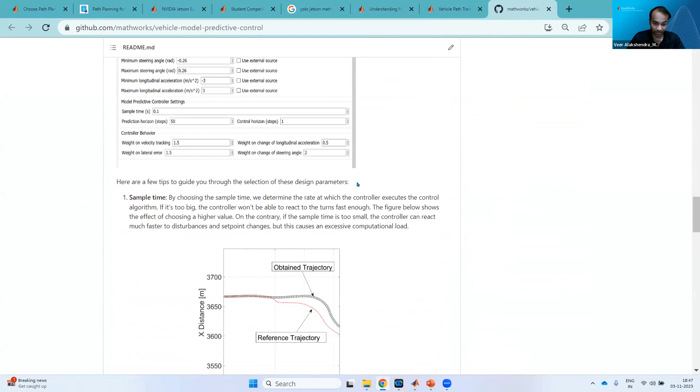You can see that. Here are a few tips to guide you through the selection of design parameters. I didn't go into detail because we are running short on time, but here I have provided all the details, like how you select the sample time, prediction horizon, what will happen if you change the prediction horizon. These are all in here, and there are certain troubleshooting tips also that we have provided. Okay.

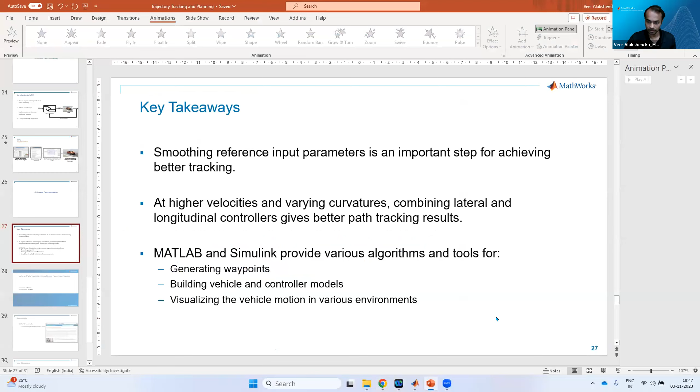Yeah, so just last thing, MATLAB and Simulink provide various algorithms, and most of these algorithms are code generatable, because if you're working on autonomous driving, ultimately you have to deploy or flash your code, because you have to run an actual vehicle. So these are code generatable.

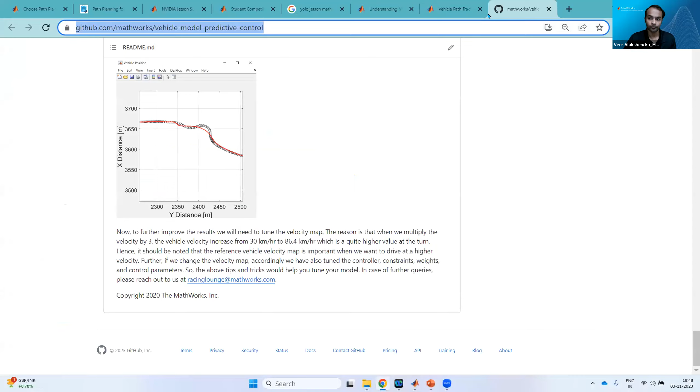So the thing that we presented today is all documented in the form of a technical blog. This blog is called Simulating Trajectory Tracking Controllers. It points you to all the videos, all the GitHub submissions, all the models. So you can also have a look into this.

It starts with how to form a reference trajectory, what is the vehicle model, and a respective video for this. And then for pure pursuit, we have a video. Stanley, we have a video, and also for the MPC, we have the whole video. Okay, fine.

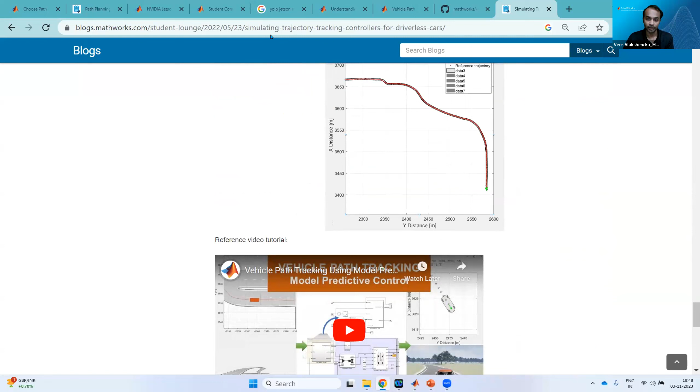Actually, in dynamic disciplines, there are some rounds where we have to take multiple laps. For example, in skid pad or autocross, you have to take multiple turns. And I heard that some people do the first lap as a trial, and then based on the memory, they attempt the fastest laps. So how do you see that could be implemented?

Could be like, what did you ask last? How it can be implemented in the simulation, like how we have to store this information and use it in real time for the upcoming laps. I think so.

So what happens, Kaushik, is that, yeah, I think that's a good point. So first, in terms of trajectory tracking controllers, if you ask me, the best strategy is based on the tests that you do. That will give you the information about which controller is suited for which one. For example, for the acceleration run, if you want to do driverless, your pure pursuit works, that's fine, right? It's just going in a straight line. But if you go to the endurance run, it has different twists and turns, so maybe MPC could be better.